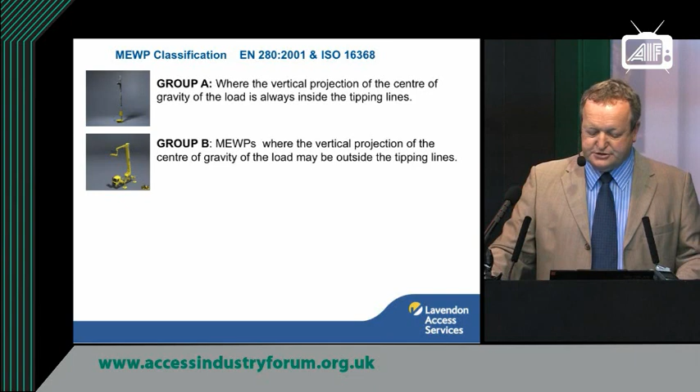Within those two groups, Group A and Group B, there are different types of MEWPs. Type 1 is where the MEWP has to be fully closed down to be driven around. Type 3 is where the MEWP can be travelled with the platform raised in the air. So a Group 1B machine would possibly be a truck-mounted vehicle, a boom with jack legs or outriggers, whereas a 3B would be some kind of boom which you can drive around with the boom elevated.

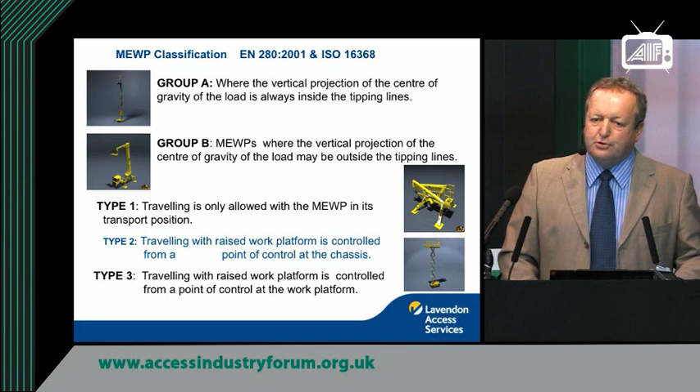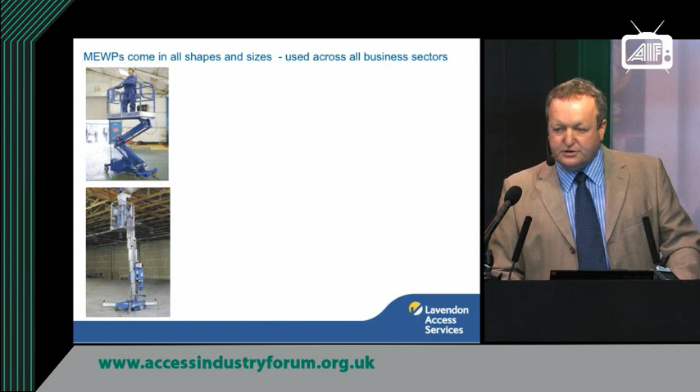I kind of look upon that as being the metric description. In the olden days, MEWPs were known as scissors, booms, cherry pickers, flying carpets. They come in all shapes and sizes, and are used across all business sectors and all parts of the industry, from little small ones—these are just two examples of the many types out there. This type of machine has become far more popular since 2005 with the introduction of the Work at Height Regulations.

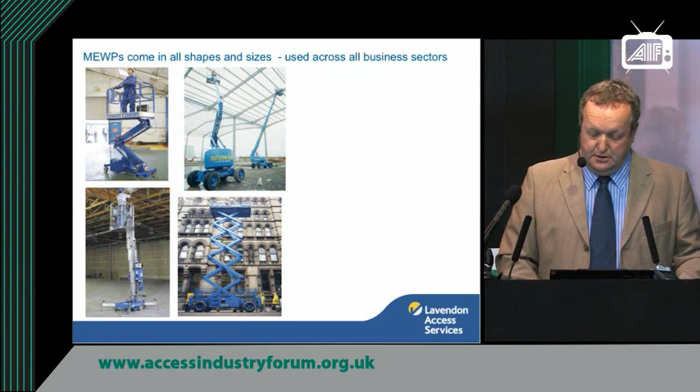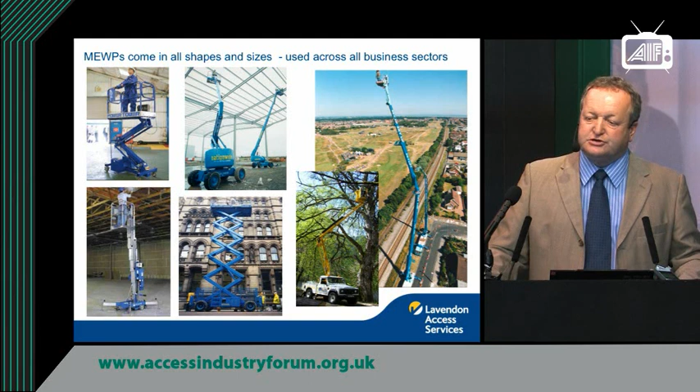More commonly you see booms and scissors of this type here where they go from somewhere near 25, 30 feet, and there are now even self-propelled booms which go up to 135 feet. Then you've got your truck mounted and van mounted machines as well. As you can see, they're used in all different sectors of industries, mainly in construction to start with, but they are being used throughout every industry now as their benefits are being realised.

So go back to the question, now we know what a MEWP is—are MEWPs safe? Yes, coming from the largest powered access company in Europe, I'm bound to say yes, MEWPs are safe. But it's a bit like saying, is your car safe? Well, yes, your car is safe as long as it's used and maintained correctly. So I would say exactly the same with MEWPs—yes, they are safe if they're maintained and used correctly.

MEWPs are safe and the safest and most efficient means of providing temporary work at height. That is reinforced by the HSE. If you look at their guidance and reference documentation, they recommend that where working at a height and you need temporary access, MEWPs should be one of the first considerations.

MEWPs have helped reduce the number of fatalities from falls from height. If you look at the number of falls from height back in the early 90s, it was somewhere in the region of 90 fatalities a year. That has now reduced dramatically and is down to about, I think, 38 for 2009-10.

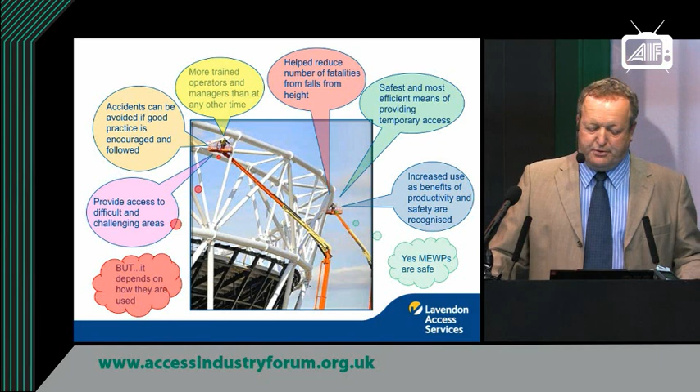But there is one proviso as well. We're actually using these machines in far more challenging situations than we were a few years ago. The example of using MEWPs balanced on the end of a stick 135 feet up in the air is a dangerous occupation, and you have to make sure the machine is very safe, and that the way you use it, you follow all the best practices and guidance. So yes, MEWPs are safe, but it depends on how they're used.

And unfortunately, things do go wrong, and when they do go wrong, it has serious consequences. Between 2003 and 2010, there have been 15 fatalities using MEWPs - 10 of those with booms, and 5 with scissors. And with the accident investigations that have followed serious incidents and fatalities, it's been clearly identified that there is a number of key points where failings have occurred.

These are not by any means all of them, but these are the major ones. Inadequate route planning - people just jump on the machines and drive them somewhere without thinking where they're driving. They drive near overhead structures, over uneven ground, and it causes serious problems.

Incorrect MEWP selection is another serious problem, where there's a machine there that works at height - I'll jump on it, I'll borrow it - and it's not the best machine for the job.

Driving across uneven ground has serious consequences as well. If you're in a boom and you're on the end of a stick 10 or 15 meters away from the wheels and you go over a small bump, that is exaggerated, and these MEWPs can have a catapulting effect if you drive over uneven ground.

Poor visibility - people working in the tops of roof structures and places which are dimly lit - that has been shown to be a cause of accidents in the past.

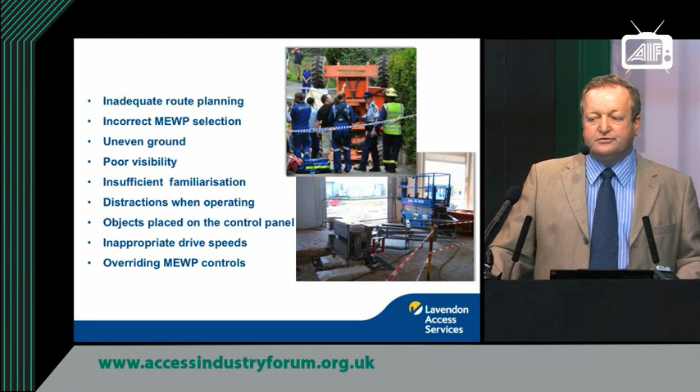And believe it or not, also, one of the causes of accidents is people actually overriding the safety devices provided with these machines. These machines have no end of safety devices built in, but people, believe it or not, override them.

So what legislation do we look to guide us on how to use MEWPs safely? Well, there are three key pieces. One is the Provision and Use of Work Equipment Regulations, which came out in 1998. It talks about the suitability of the work equipment, maintaining it, and inspecting it before and during use. It makes sure that before you use any work equipment, you have the correct planning, and you provide information, instruction and training to those who are going to use it.

LOLER, the Lifting Operations and Lifting Equipment Regulations, again 1998, talks about the strength and suitability of lifting equipment. Have you got the right piece of lifting equipment for the job? Is it going to have the capacity to do what you want to do with it? Is it clearly marked with the safe working load, the maximum number of people, the wind speeds it can operate in? It has to have definite, clear, key safety critical information available with the lifting equipment.

Does the lifting equipment have a thorough examination inspection? For MEWPs, that is within the last 6 months as a maximum. The people using your lifting equipment and planning the lifting equipment, are they competent? And is the operation planned, and are suitable records kept?

And the Work at Height Regulations 2005 says those who are going to plan, organise and manage the work at height have to be competent, and there's an avoidance hierarchy. Selection and inspection of work equipment for work at height is critical. And if you start to look through those three key bits of legislation, there are some key messages that come out throughout them all.

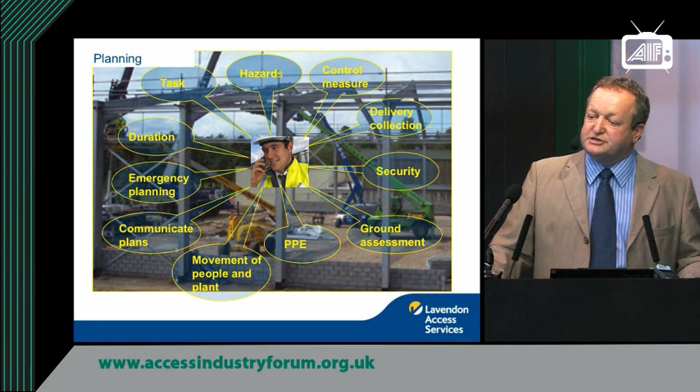And what personal protective equipment should be used in a MEWP? We could have a whole talk on that. But it is recommended that a full body harness with a work restraint lanyard that prevents anybody getting into a position where they can fall should be used in every type of boom MEWP. For scissor lifts, it comes down to risk assessment, but that will often include the use of harnesses too.

There are about 40,000 MEWPs in use now, slightly down from 45,000 in 2010. But MEWP selection - again, we could do a whole talk on that.

When you're going to use this MEWP, how are you going to get it to the site? Do you have any obstructions you have to get through, over or around - narrow doorways, gateways, ground conditions? They all have to be taken into consideration. If you're going to take it over soft ground, does it need to be a track machine or a wheeled machine? And should it have outriggers to extend the footprint and give it a lower ground pressure?

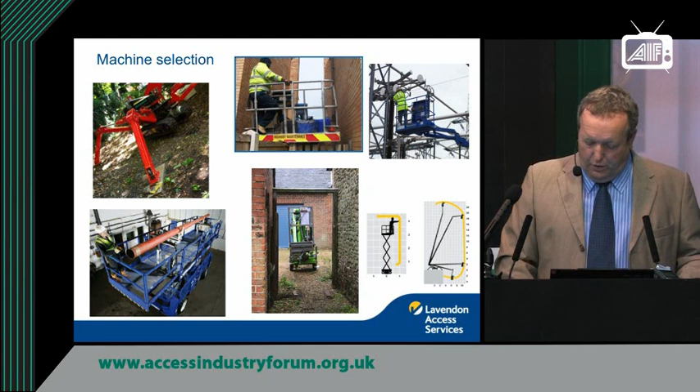And when you're going to use this MEWP, what about accessories? Are you going to put pipe work in it? Are you going to use other materials in there? Do you need something to make those materials safe and secure, to stop them rolling around? There are 101 considerations when you start talking about MEWP selection, and every one has to be considered to make sure you get the right selection.

So we've now planned the use of the MEWP. We've inspected and selected the right machine. If you're not sure which machine to select, feel free to contact hire companies who will quite willingly come out and help do a site survey for you and recommend the type of MEWPs you should be using. So you've now got the MEWP and you're going to use this machine.

The next key thing you have to do is make sure you've got the correct inspection processes in place. That would start with making sure the machine has a current thorough examination certification, current within the last 6 months as a minimum. On the certification, the competent person may have put some comments. If they're Category A comments, make sure the defects mentioned have been addressed and rectified before you use that machine. So it's not just a matter of saying yes, it's got a certificate of thorough examination. Have a detailed look at it, make sure it's the right certificate for the right machine, and there are no outstanding defects on that thorough examination report.

So you're now going to use this machine. You've got to make sure someone's going to do the daily pre-use checks. Who's going to do those? Are they competent to do them? Do they know what to look for? Well, the manual tells you all that, what to look for and where to look. But it's not just about the daily inspections. There's also intermediate inspections on a weekly basis, on a regular basis following that. If you've got a machine on long-term use, don't think that just doing a daily check is sufficient. As I said, there's intermediate inspections.

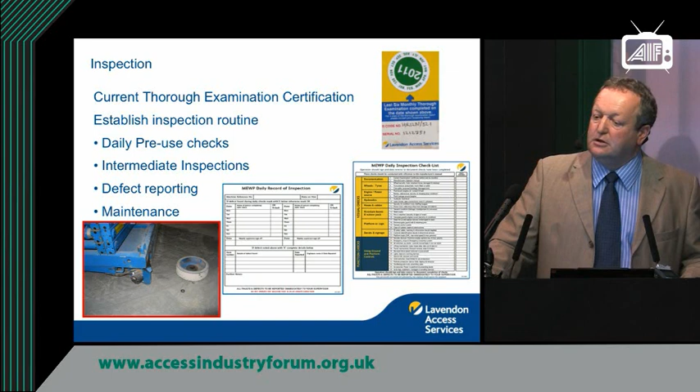And then don't forget, with your inspections, there's maintenance. Maintenance of machines is everybody's responsibility. We don't expect you to take a grease gun to this machine, but if you're going to hire a machine for a long period of time, you need to make sure maintenance is going to take place at the appropriate times, and you're going to make that machine available for maintenance and inspections. So there is the need to consider the maintenance as well.

So then we come on to competence. The person using the machine, are they competent to use it? What is competence? In my mind, competence is theoretical knowledge, practical knowledge, and experience of using the machine. So where do you get the theoretical knowledge from? I've already said that IPAF in 2010 did over 84,000 operator training courses. And currently there are, believe it or not, 360,000 people out there with a current IPAF operator's license.

But there's not just operator courses, there's demonstrator courses, there's MEWPs for managers courses, and IPAF are the industry leaders in these type of courses, but there are other people who do courses as well. And then there's familiarization. Before you use the MEWP, or before you ask someone to use that MEWP, make sure they are familiarizing how to use that machine.

Make sure they know how the manufacturer recommends it should be used and what warning signs mean. Make sure they know the features of the specific model, and they know how the control functions work, which goes up, which goes down, which telescopes out, which telescopes in, where the stop button is, not just at the platform controls, but the ground controls. And make sure they're very familiar with the safety devices, the emergency stops, the tilt alarms, the elevated drive speeds, and the emergency lowering procedures. And all that information can be found in the operator's manual.

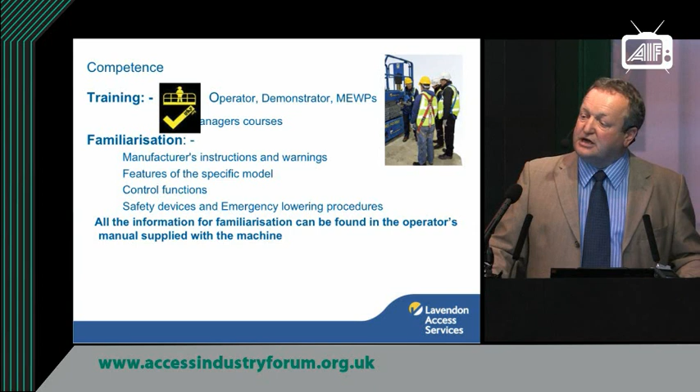The other thing about familiarization is that when the machine is delivered, the person who takes ownership on the first day may not be the person who uses it in the coming weeks. Somebody else may jump on it one day down the line, so you've got to consider familiarizing them as well and allowing them time to get familiar with the machine. Familiarization is a very big issue.

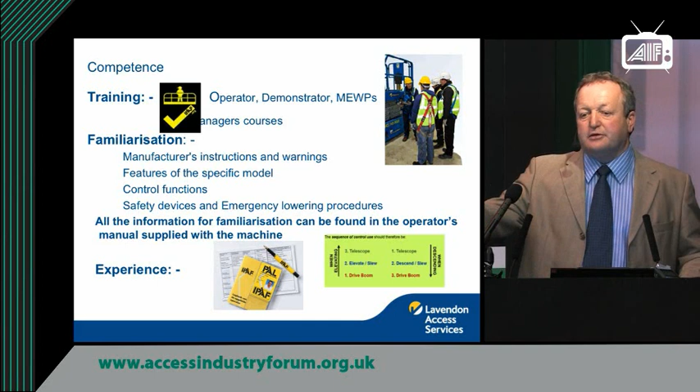And then you come to experience of using the MEWP. How do you know somebody is experienced to use that machine? Well, IPAF produce a logbook, and if you get your users to record their experience in that logbook, you can then measure their experience over a period of time and demonstrate their competence.

How do I know people aren't familiar with machines? We at Lavendon have a technical services department, and we analyse all the breakdowns reported through that centre. 30% of all breakdowns reported to Lavendon on the hire of their machines are down in some way to what we classify as operator error.

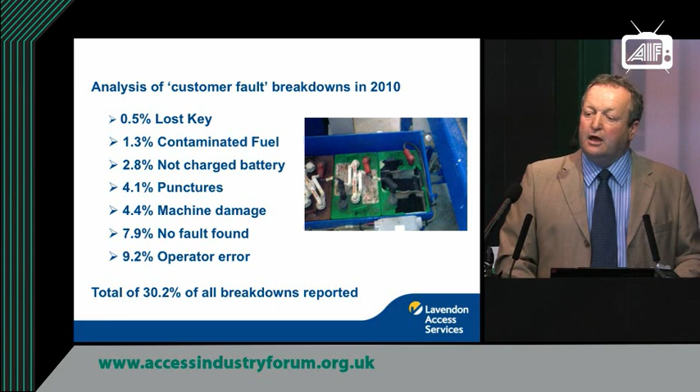If you actually look at the three bottom figures there - the 4.4% machine damage, the 7.9% no fault found, and the 9.2% operator error - that adds up to somewhere in the region of 20% of customer-fault breakdowns with machines being down to misuse, with the customer basically not knowing how to use the machine.

So back to the question: are your MEWPs safe? Well, that depends on you. I'm sure you're all aware of Heinrich's domino theory, where an unsafe act can cause an accident and result in injury. Well, I have the same belief with the safe use of MEWPs.

You have to make sure you get the risk assessment right. You have to spend a lot of time planning the use of the MEWP. Make sure you select the right MEWP, and make sure you have the correct inspection processes in place, with competent people to do the planning, supervision, management and operation.

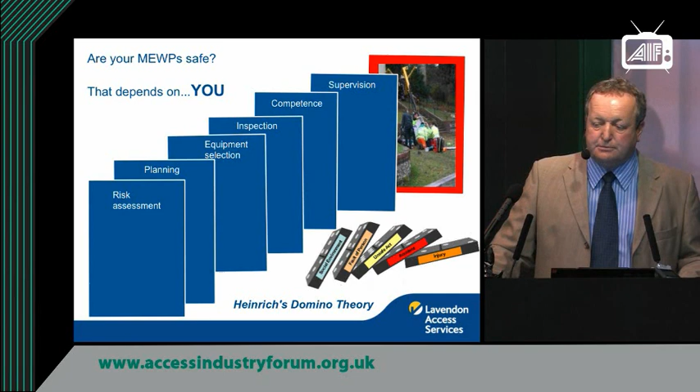But also don't just trust that the guy will use it safely - make sure you supervise him as well. If you can get all those key factors in place, then the safe use of MEWPs is more than hopefully guaranteed. But I said I would show you, in the last couple of minutes, a couple of examples of where things have gone wrong.

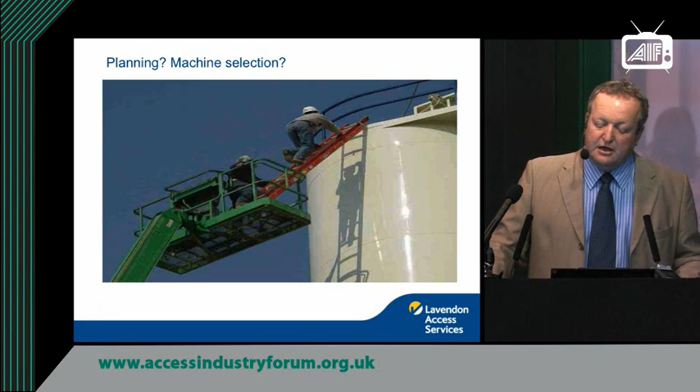This one is a failure to plan correctly. The machine wasn't planned to reach that access there at height. If they'd needed to get up there, they should have used a bigger machine - better machine selection.

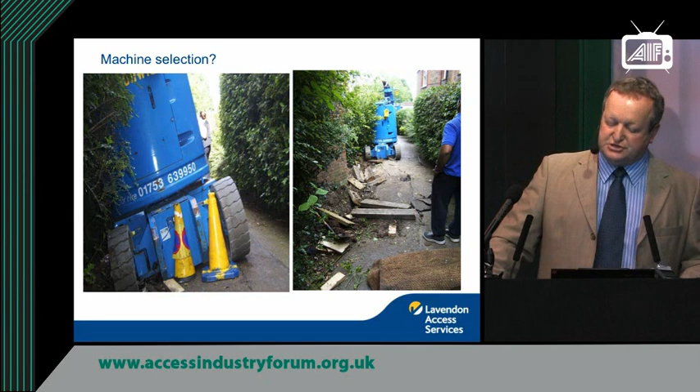Damage to the path here - the machine that damaged the path weighs 6 tons. A little tracked, narrow machine, weighing about 2 tons, could have given the same reach but would have done none of the damage. Are those guys competent to use that machine?

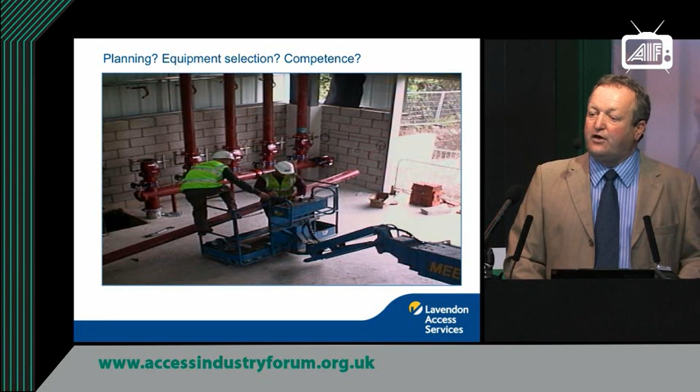Should they be carrying that pipe like that? Should they have a different type of machine to do that particular job? All issues where it highlights the failure in the planning, selection and use process.

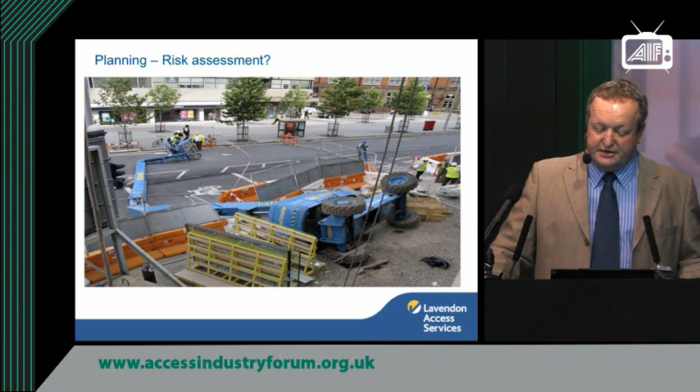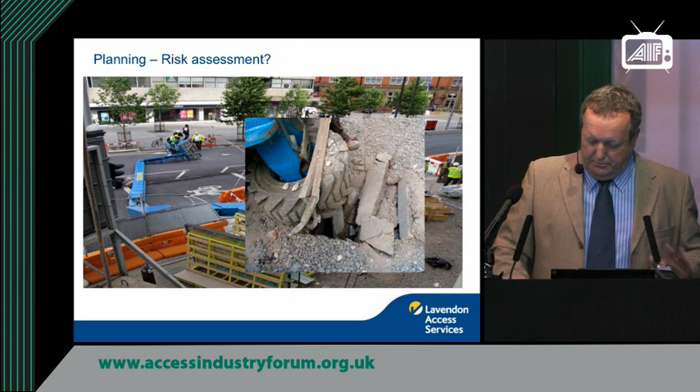Unfortunately, this was a serious incident where someone didn't identify that there was a manhole cover, and the machine got driven onto the manhole cover. Part of the planning, if you're going to use machines, should be looking at drainage plans - if there's a manhole cover, make sure it's highlighted and protected.

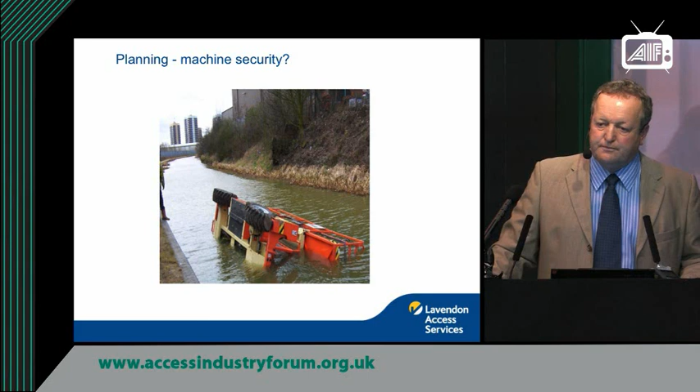Security of machines - this machine wasn't properly secured, and the consequences you can see for yourself. So there's lots of issues around the safe use of MEWPs.

And I said right at the beginning - safe use of MEWPs, is your car safe to use? If you get the things correctly, safe, and the processes correct in place, then your MEWP is safe to use. We could go through each one of those in turn, but we've already covered quite a lot of those. So MEWPs are safe if used correctly, if planned for, correctly selected, correctly inspected, and used by competent people.

And where do you find information on that? If I had one minute to recommend three bits of guidance, I would recommend these: the CIS guidance note for construction, the BS 8460 Safe Use of MEWPs Code of Practice, and guidance which has just recently come out from the Strategic Forum on overhead trapping and crushing injuries to people in platforms. If you read nothing else, read those three bits of documentation. Thank you very much.